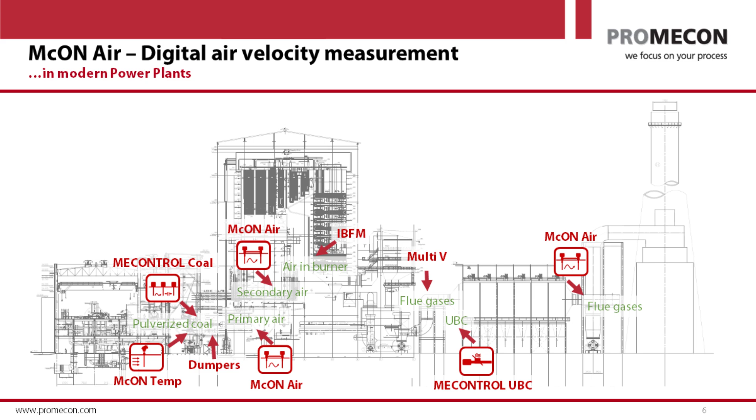So we're going to go all through that, and we're going to have a look at airflow. The first question we must ask ourselves is, why do you have such big problems with your process gas in your power station? Let's look at your process gas.

Your airflow to the boiler is mainly preheated air. So you are sucking fresh air into your system, and this fresh air is cold - it has basically ambient temperature - and it goes through a so-called air heater. Usually you have two air heaters, one on each side. This air heater is basically regenerative, so it is a rotary heater.

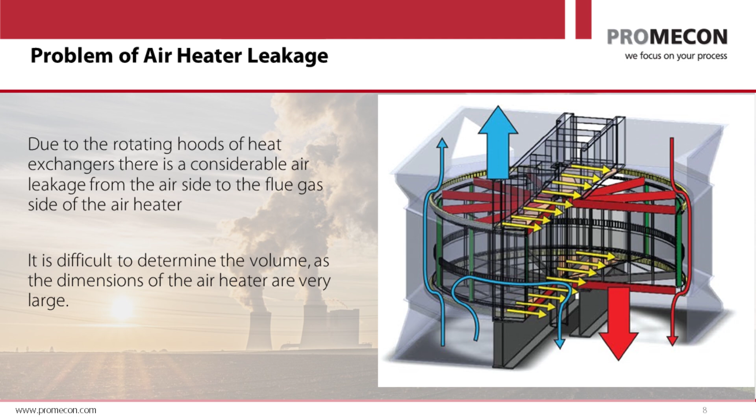But as these plates rotate, they shovel a lot of flue gas dust into your fresh air. So basically all preheated air that enters your plant is contaminated with ash. You have ash in your ductwork, and if I think about some Asian markets like India, where you have high ash content in your coal, you have a huge amount of ash transgressing from the flue gas side into your fresh air side. And there it causes a problem. What is the problem that it causes?

So it's possible that one impulse line gets blocked with ash, and this is very common. I would say if you have 50 measurements in your plant, or 30, about a third of them are at this moment suffering from some sort of congestion with ash. And what this does is it changes the delta pressure across your DP transmitter. Now, you must think of one thing.

If your power station is located at sea level, you're looking at 1,000 millibar of total atmospheric pressure. Your DP transmitter is only measuring the delta P between static and dynamic pressure, but it all floats on a constant barometric pressure of 1,033 millibar. So if you have a blocked pipe, what is the pressure on the other side? You have a huge drift impact because of that. Your delta pressure will drift as your impulse lines are blocked, and this drift will cause a drift in your measurement value.

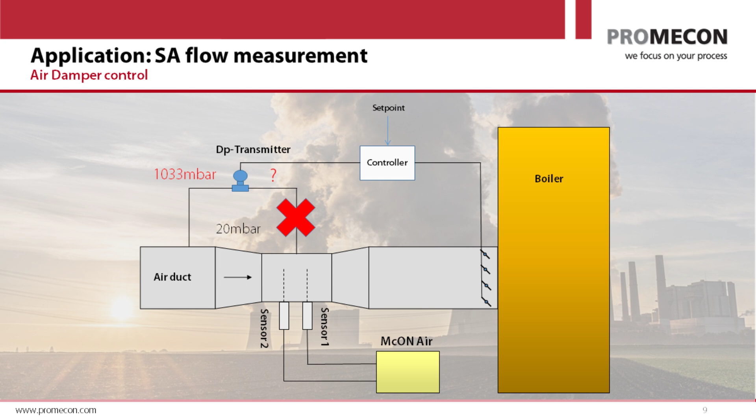Now, pay a little more attention to one more feature, which is the controller. The DP transmitter goes into your control system, and the control system adjusts your vanes in the duct to control the airflow. This is very important because the airflow to each burner, to each mill, is a controlled value to a certain set point. It's impossible for your operators to see a drift in airflow easily. It's very tricky because all of your airflows will be controlled to set point. So even if your airflow is 20% wrong, the controller will control your dampers until your wrong DP transmitter is reaching set point. So what does it mean?

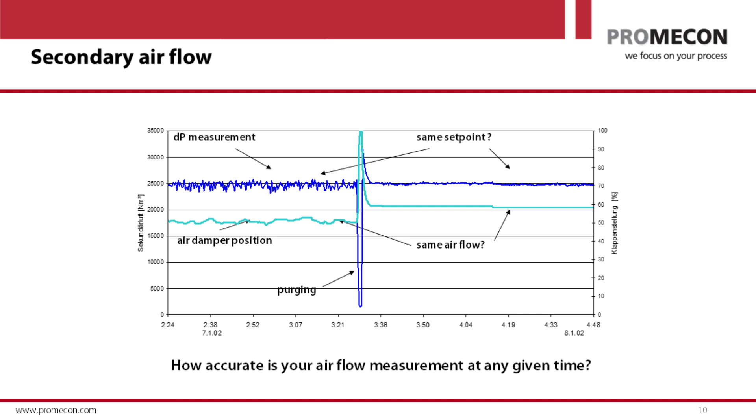That's the proof of implausibility. So you can definitely see that you had a drift in your DP measurement that you have cured by cleaning your DP measurement. You can see this in all sorts of power stations.

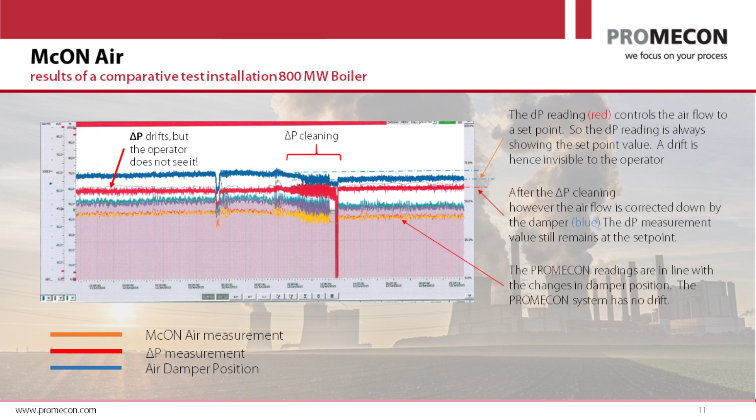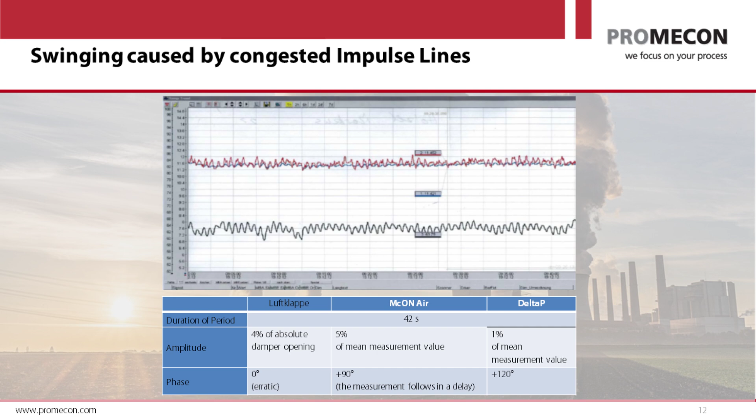This is usually when the operator first notices that he has a delta P transmitter problem. But long before that time, you already have a drift problem, and that goes undetected.

All right, now the last problem. I was talking about a vector measurement. I was talking vectors. Why is it so important to have a vector measurement?

If the air turns several dimensions, it wants to go in a straight line because air has inertia, but the ducting forces the air in different directions. As a result, the air will start to swirl because that's the physical effect of the inertia and the turn of the air. So what's the result? In every duct that you have, you might have swirl, but you don't know it. And if you measure delta P, swirl would really affect your reading. So swirled airflows are not good for delta P.

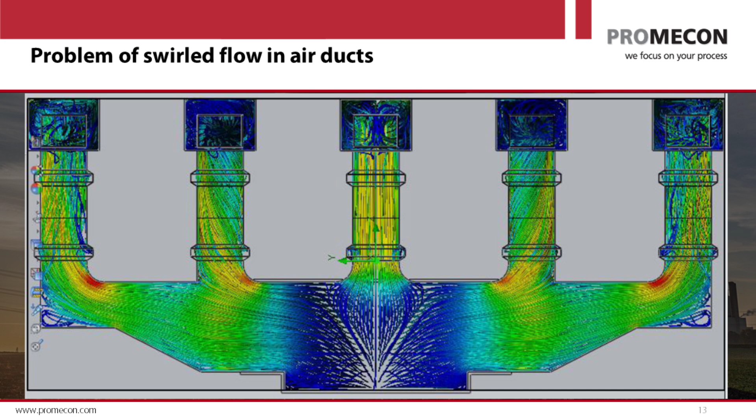So now that I have talked about problems for some time, let's go into the measurement and how to resolve these problems. As we remember, the problems were measurements are not drift stable, they drift away in delta P, and we see a huge amount of influence from swirl that can give you wrong readings.

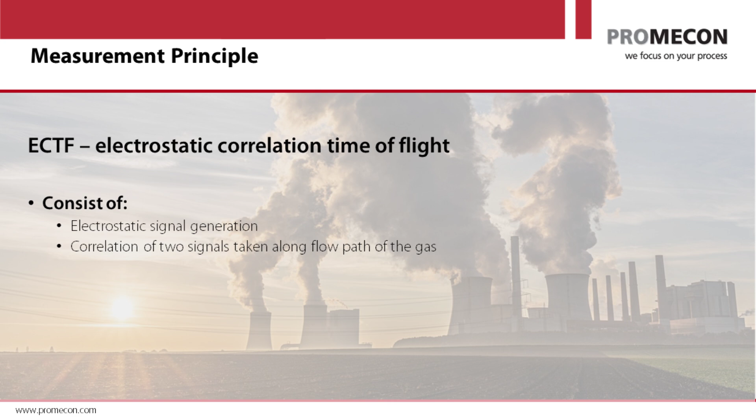The measurement that we have on the market, we've had it now for at least 15 years, is an electrostatic measurement of gas velocity. The gas velocity is measured directly with our system. We don't use delta pressure to derive gas velocity, but we measure the gas velocity directly. How do we do that?

Imagine you have a duct, shown here as the blue lined object, blue duct walls. You can see the flow direction of the gas, and in that duct you have a sensor with an antenna, and this antenna is sensing electrostatic charge in the duct. For example, if you have ash particles flowing by the sensor, the sum of the charged particles is not always zero.

Sometimes you have a slightly positive charge going by, sometimes a slightly negative charge going by. So you can have a more dense cloud or a more thin cloud. These clouds are rushing by your sensor with a high velocity, 20 meters per second, so 60, 70 kilometers an hour, quite fast. Now you have a succession of positive and negative charge.

What happens on your antenna is just the opposite - the antenna will always have the opposite charge that goes by. It's called Coulomb's law, many of you might know it, if you're an engineer you might have heard of it. So if you have more charge going by, you have more opposite charge on our sensor. Now, the change of charge over time is current, so we measure a current that has a certain fingerprint over time.

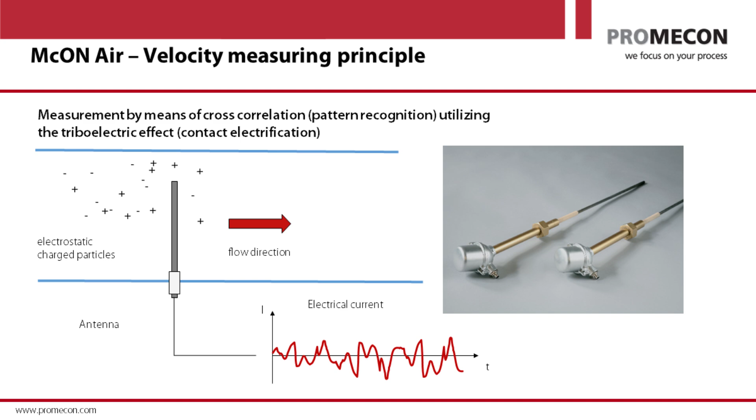We call this time signature. And this is important because this time signature is unique at every second. Every second you have a different time signature.

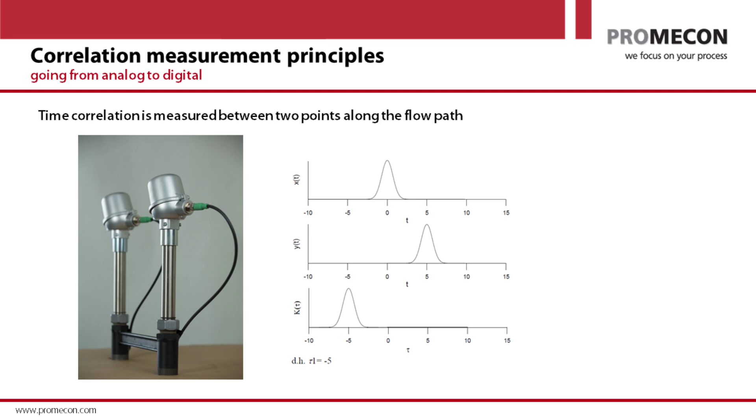Now, if you do this with real signals - you can see our boxes here, they all have two sensors, one box with a processor - you can see the signals being generated at sensor 1 and sensor 2. The signals are very similar because the sensors are only about 300 millimeters apart from each other, so they are very close. The typical flow pattern does not change between sensor 1 and sensor 2.

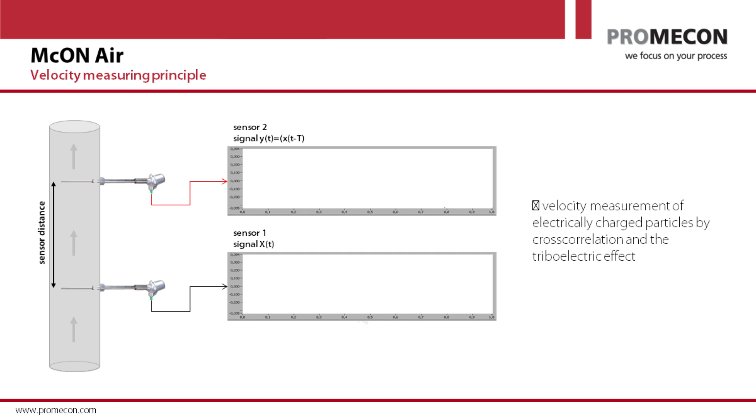It remains pretty much the same, so the signals are very similar. If you put these signals on top of each other, you can see the similarity. But you can see, of course, they are time shifted because the sensors are located downstream of each other.

You have the distance of the sensors, which you know. You divide the distance by the time, and you get meters per second. You get a certain velocity.

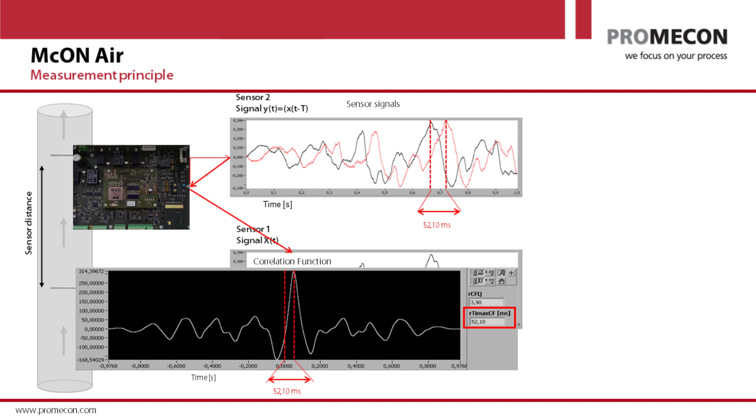Now, if you know your barometric pressure around the station, for example in Korea at sea level it's about 1,000 millibar. In South Africa, in the Highveld, it might be 880 millibar. So you can use the barometric pressure, and of course you need the temperature of the gas, and then you can calculate the STP flow, the standardized temperature pressure flow of the gas.

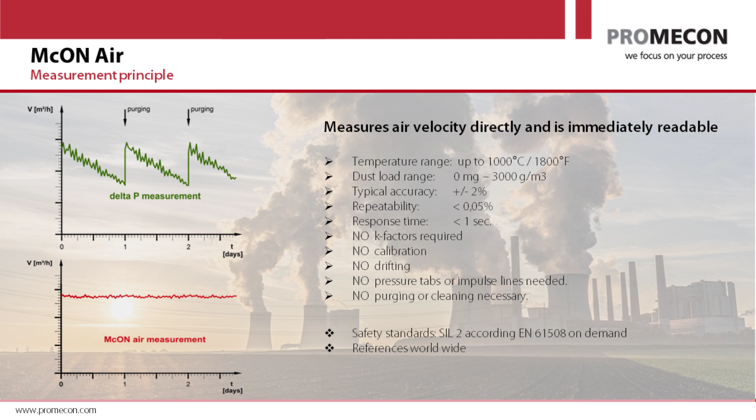That means you will not have an instrumentation engineer running around the boiler trying to calibrate 20 or 30 systems. The instrumentation engineer can focus on other tasks, such as stabilizing combustion, checking other things. Most of the plants I know do not have an instrumentation engineer checking drifting signals all the time. But your DP measurements are drifting all the time. If you put our measurement in, that problem is gone from day one.

I was talking also about the swirl and the vector measurement. Now think about one thing for a minute. You have two sensors which reach into the duct. These sensors are mounted perpendicular, or orthogonal, to the longitudinal axis of your duct, so they are basically pointing at a 90 degree angle towards the axis of your duct. And this is the vector that we are measuring.

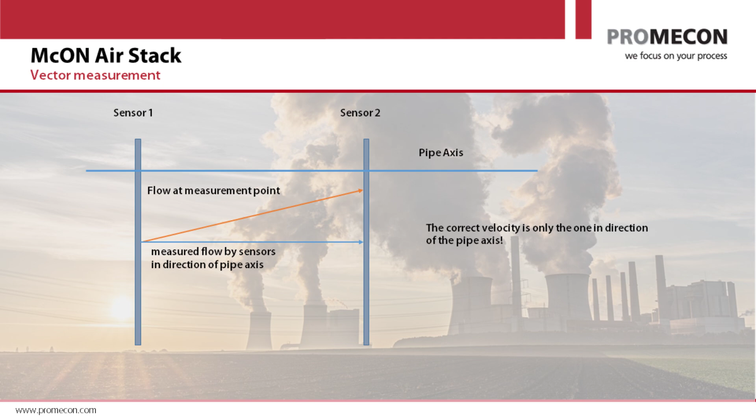So, for example, take a typical swirl problem. That's the swirl coming through like this, swirl flow, so you have the air going in a swirl direction. You will only see the vector that's between the two sensors. You will not see any impact of the swirl.

This system has also been tested in stacks by the German technical organization TÜV, and they came up with the result that our measurement is the most accurate measurement they've ever tested, because of this ineffectiveness of swirl on our measurement. Swirl does not affect us.

I know that from some of the installed systems around the world with delta pressure, they use what they call honeycombed flow straighteners in order to take the swirl out of the measurement. All these flow straighteners give you a pressure drop in your duct, which means you use more fan power. All of that stuff we don't need.

If we have an existing venturi, that's the ideal location. We just put our sensors into the venturi throat, and here's your perfect measurement. You don't have to worry about anything else.

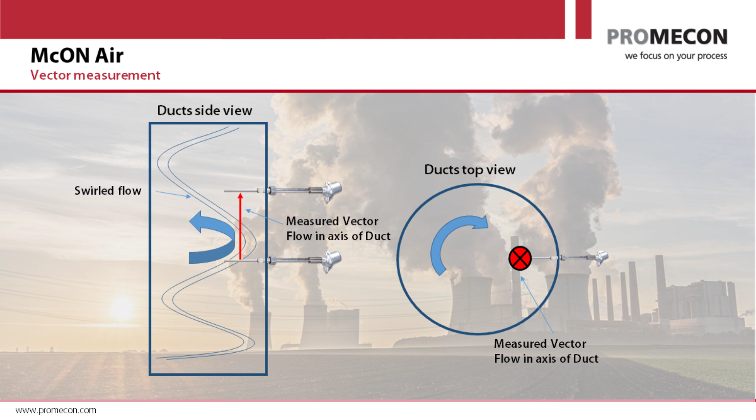Now there's another feature that is very important for you to understand, and that other feature is about the ionization of your gas. In your power station, most of the time, your gas flow is dusty, so you have enough electric charge to mark your gas flow and make it possible to read it digitally with our electrostatic sensors. However, when you start the boiler up, or when you have cold air that you put into your pulverizer, or also when you run at very low load, the electrification of the gas is not very good. So then we don't see enough electric charge that we can sense and correlate in order to get a good gas flow.

For this, Promecon have invented the range extender. What is a range extender? A range extender is basically a rod that is protruding into the duct, and it emits small amounts of ionized charge. This is a little bit like a spray electrode in a precipitator, but our charge emission is much, much smaller. It's just a very, very little charge emission.

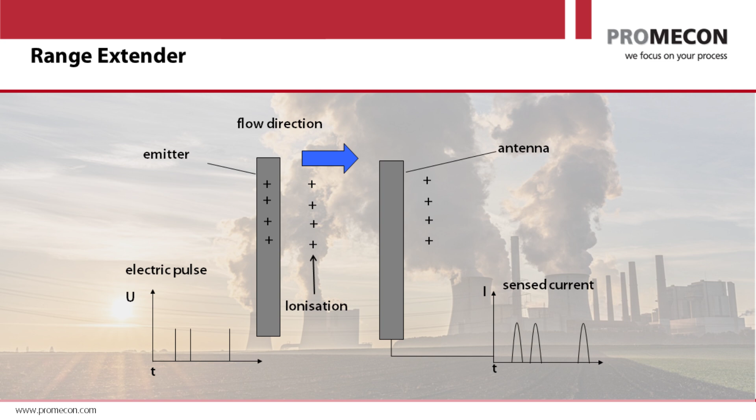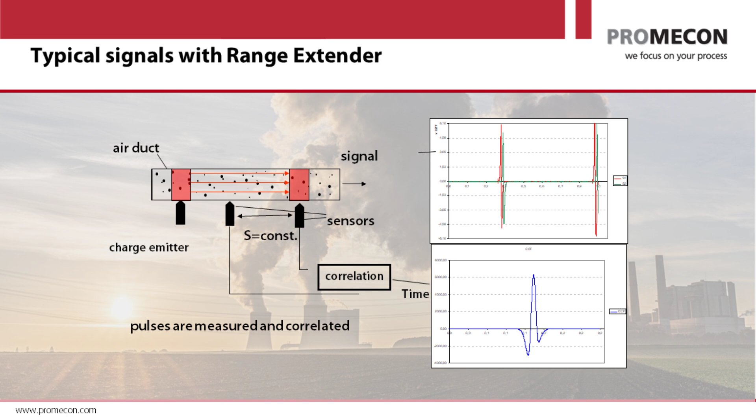If you do that, and the electric pulse is not periodic but a certain non-periodic function, then it correlates the same way that other signals correlate in the duct. So you can see here the electric pulse, the sensed current, and the cross-correlation here, which is typical of a range extender signal. You can see the two signals on the top right, and on the bottom right, the associated cross-correlation function — very sharp, very precise.

The range extender has some big advantages. It's not only expanding the range of dust levels that we can measure down to zero — so we can measure with zero dust and with very high dust — it also expands the measurement range down to just a few meters per second. If you put our measurement into a Venturi, at full load the Venturi has, say, 40 to 45 meters per second. Our range extender starts at 3 meters per second, 2 meters per second. So you have a 20-to-1 turn-down ratio.

If you have a turn-down ratio of 4, which is typical on a delta P transmitter, you are lucky. Delta P transmitters have a lousy turn-down ratio. But the turn-down ratio of this instrument is very high because we have a linear way of measurement at the time of flight, and with this range extender, only very small velocities are already detected accurately.

Why is that important? You want to know, for example, the cooling air to your burners once you shut off burner rows.

If your power station doesn't have a big load factor — let's say you're not producing much power all the time, you have solar power, wind power — we have this all in Germany, so the load goes up and down. Many times you have to go on low load, you switch off burner rows. How can you ensure that your cooling air to your burners is correct?

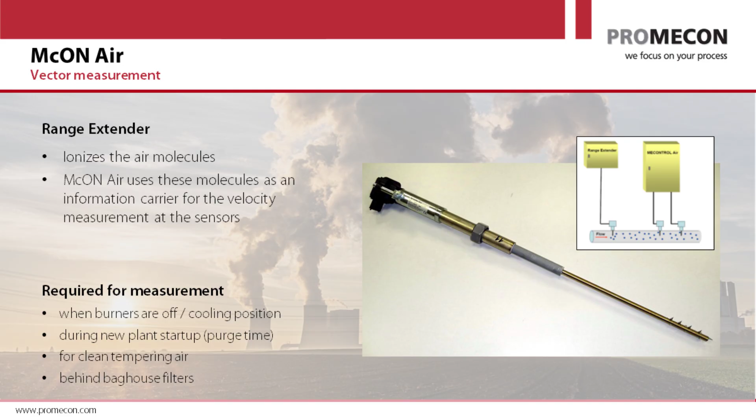So let's look at a couple of technical features. This is how a system looks. We have a McON Air box, which you can see on the right-hand side. It contains the electronics, the outputs, and the power supply. The power supply can be 24 volt DC, or also 230, 120, wide range. Then you have the two sensors going into our box, which give us the raw signal that is computed in the box. You can hook up a temperature measurement as well if you would like to compensate for temperature.

And you can also, of course, put in the range extender. For power station applications, we would always recommend the range extender, because you don't want to have a drop-off signal if you go to very low flows, cooling position, whatever. Also, if you start up mills, we would always recommend a range extender for power stations. We have power stations where the system has been running for 10 years without dropping, without drifting.

Imagine if you have cooling air, 5% of the airflow through your burner, with a turn-down ratio of 20-to-1 — how accurate do you believe your delta P transmitter is at that low rating? I tell you, it's showing you any random number. It's some low value, but you have no idea whether you are currently running 2 kilograms per second or 6 kilograms per second.

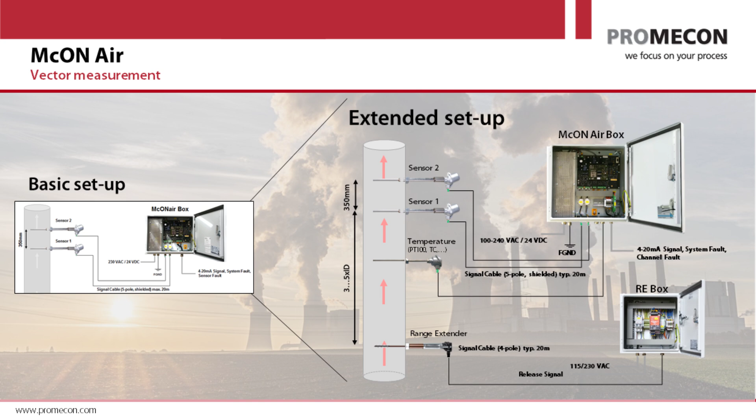So it's a very safe device to use, especially for boiler purge when you start up your boiler. Again, if you have low load factors and have to take boilers out because of renewable energy, it's very important that your airflow and gas flow measurement is reliable and accurate, because you need to do many boiler startups and run the boiler at low load. And that is always an airflow issue.

So what's the motivation to install our systems? I think I've mentioned it all. You have basically delta P transmitters in your plant, and we know many plants that are very desperate. If you give us some screenshots of your DCS system, of the mill, and of the draft fan group, along with some trending data, we can show you how implausible your airflow measurement is in your plant. It's very easy to see that your airflow measurement isn't working as it should. So I invite you to contact us, even via the internet or email. You just send us the screens, and we show you in one or two calculations that this can't be right, that you must have a big problem.

The second issue is permanent cleaning of the delta P measurement. When I go to power stations, I've seen hundreds in my life, I ask them how often they maintain their airflow measurements. They usually say, well, we maintain our primary airflow measurement very well. Then I ask, what about your secondary airflow measurement? And the typical answer is, oh, secondary we don't do. It's okay. And you all know it's not okay.

The secondary airflow measurement has the same problem as the primary airflow measurement. The only reason people in the plant maintain the primary airflow measurement is that you have maybe 4, 5, or 6 of those to take care of. The secondary airflow measurements, you have 10 or 20. So it's simply unsustainable to do all this cleaning, and that's all gone once you shift over to a digital flow measurement.

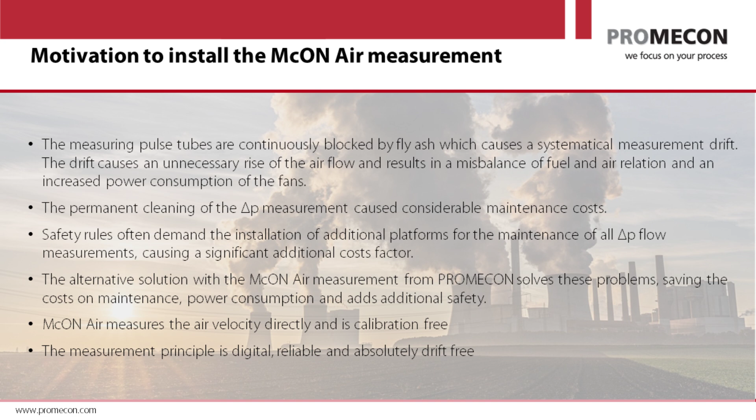Then, of course, there are safety rules. So basically, the big motivation is to get a grip on your airflow management and gas flow management through the boiler, which is a very neglected measurement. I think it's the most neglected measurement in a power station, because somehow the fire keeps burning and you keep producing. With a delta P flow measurement, you don't have to shut off the boiler, you can still run it, but you're running far from the levels of accuracy and efficiency you could achieve with better airflow measurements.

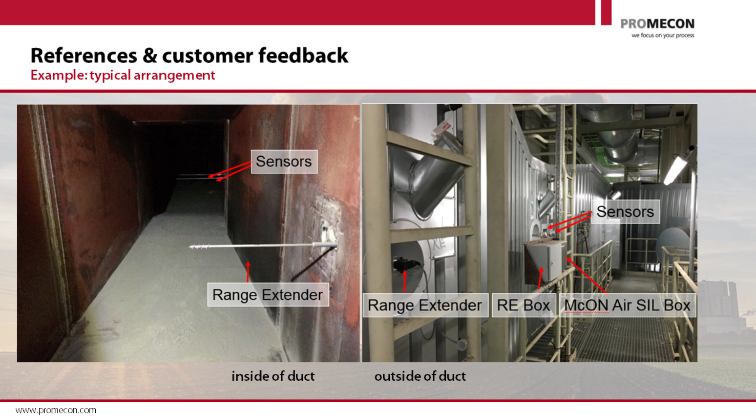The retrofit of our system in an existing plant is fairly simple. You put in a couple of holes, add adapter pieces, place the sensors at a certain distance, install the range extender, and that's basically it. That's all you have to do, and then you're finished. What you get is a digital, correct flow reading to the boiler at all times.

Another example is not an Alstom, but a Mitsubishi Hitachi boiler. You can see here an individual gas flow to a burner.

Similar thing, they had Venturis, and then they put in the measurements. Here you can see the two sensors inside the Venturi, and also individual measurements. We've done this with a lot of the modern new Mitsubishi boilers running in Europe.

One thing I have not talked about, just to finish this up, you have basically two sides of your boiler that are important for gas flow measurement. One is the inlet side, which is all primary airflows, secondary airflows, overfire airflows. That's the inlet side. And why is it so important?

You would like to have the right air staging across all burner decks for the secondary air. You would like to have the right overfire air in the overfire air ports, because if you don't have the right airflow, you don't have the right penetration depth of your OFA, and OFA becomes ineffective. And of course, most important, you would like to have the right airflow into your pulverizer, into your mills. If your airflow to your mills is wrong, everything else is wrong. You have the wrong particle size, you have the wrong coal flow distribution, you have basically the wrong bed depth of your coal in the mill. This upsets your mill and can make your mills unstable. You can even trip your mill if you have the wrong airflow.

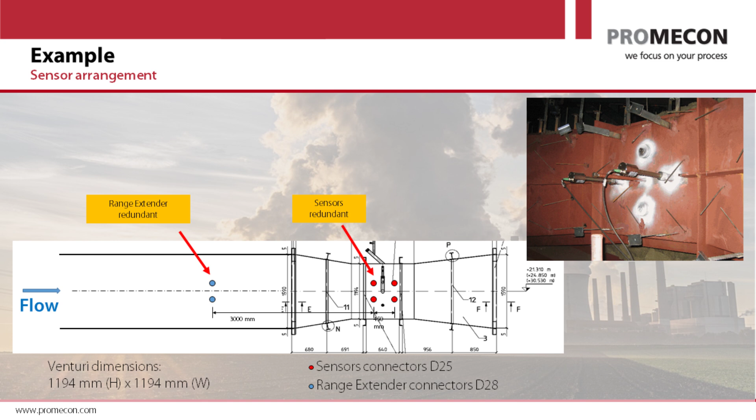By the way, if you would like to measure your coal velocities to your burners, that's also something that we can do. We're one of the few companies in the world that can also measure the dirty airflow after your mill into your burner, so you can see the right impulse of airflow into your burner. It's even possible to measure the coal mass flow to your burner, so you can have a very good indication online of how the coal distribution to each burner is.

So that's the inlet side of the boiler. But what about the outlet side? Once the gas is through the boiler, is everybody happy that it's over, it goes through the ID fan and then into the stack? Are there any issues that you can find on the outlet side of your boiler?

Well, what we've found many times in many installations is that the total gas flow through the boiler is not correct. And needless to say, very often it's on the high side, and that's exactly what you don't want. Why? If your gas flow is too high, you have too much energy that you put out the stack, right? The energy loss through the stack is directly proportional to the amount of gas flow that you put through.

The second problem is that the capacity of your flue gas cleaning system is under stress. If you overload your bag house or electrostatic precipitator with too much gas, you're pushing too many particulate emissions into your stack. And thirdly, you have one or two monstrous ID fans that push the gas flow to the stack, sucking it out of the boiler and pushing it to the stack. Those ID fans are also running at a rating above their normal rating, and they are large electricity drains. You lose a lot of money and electricity on these ID fans.

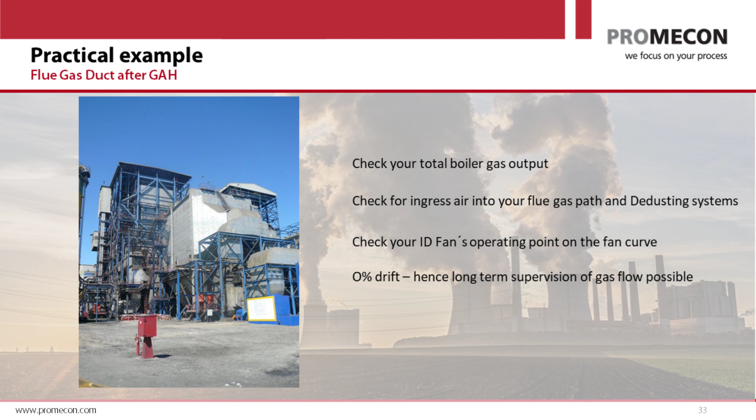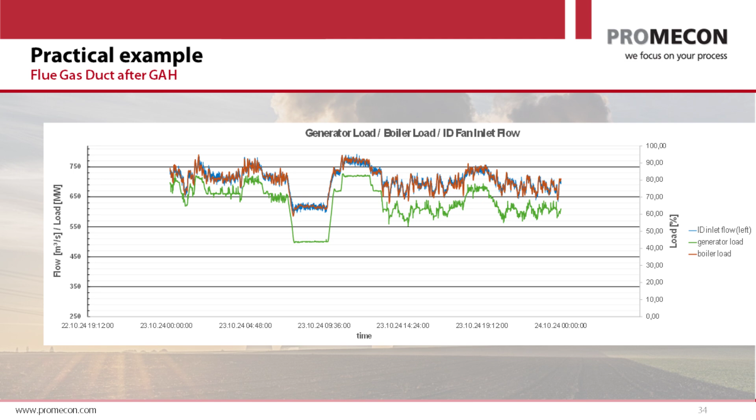Let me give you an example. This is a typical example of a generator boiler load. You can see the boiler load and the generator load in green and red, and the blue line is the typical ID fan flow. The blue line lies exactly on the boiler load, so it's directly proportional to the flow of the gas. This tells you exactly how much gas your boiler is putting out. I've never seen an online measurement of this working correctly with delta P or whatever. I think our visual measurement is the first time people can really do this.

Oops, what's that? Oh. Okay, go back to this one. Sorry.

The best location would be on the ID fan inlet, so you can directly see how much gas is pulled out of your boiler system. That gives you very good control over how much gas is getting into the boiler, but also how much gas is pulled as ingress air into the flue gas ducts.

We've done several projects where customers were very interested in that. For example, some customers really want to know where on the fan curve their ID fan is currently operating. You don't know that. In your DCS system, you have a diagram where you can see the ID fan, and you can pull up a typical fan curve of that fan on your DCS screen to see at which point the fan is operating. I'm telling you, the point indicated is most probably incorrect.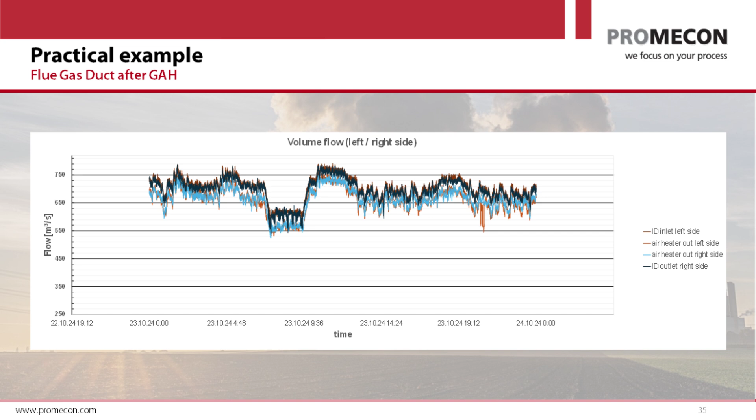The question has to do with airflow measurement with a different fuel: would the airflow measurement behave the same if there is a mix of biomass pellet blended with coal? The answer is absolutely yes. There is no impact at all of the fuel on the airflow measurement, because what we are doing is measuring basically the time of flight between 2 sensors, and biomass has no impact on this transit time. So we can say absolutely no impact. We have done airflow measurements in biomass plants, in plants with mixed fuels, as well as in pure coal plants. So the answer here is 100%, no problem.

Very good. Very good.

Another question on the instrumentation itself: what is the recommended interval for performing maintenance on your system, and what does this involve?

If you have a non-SIL system, not safety integrity level rated, just a normal system, we recommend looking at it every major overhaul, meaning physically checking the instrument for damaged cables, checking the condition, and pulling the sensor out to check it. If the sensor is dirty, it doesn't have to be cleaned, it just has to be functional. So there's actually nothing really to do. What we recommend is visual inspection at certain intervals.